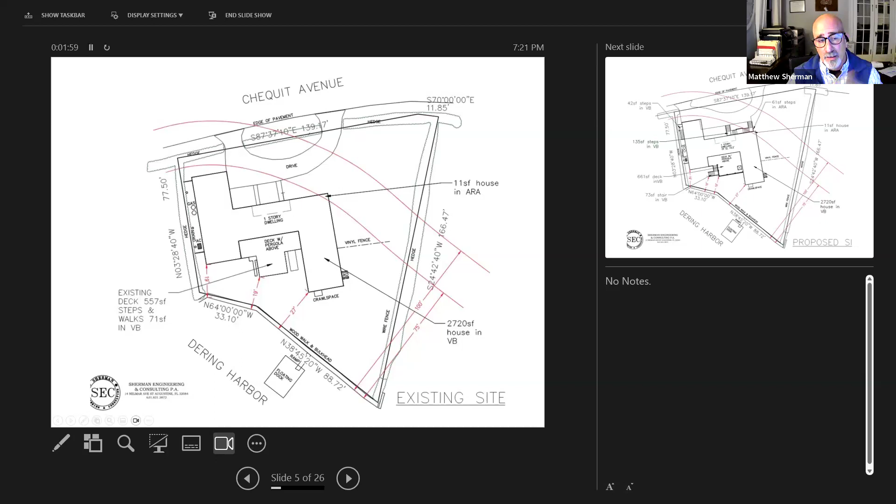There's an existing deck on the water side of the house, 557 square feet. Then there's a walkway on the left-hand side, a couple of stairs down, and a little walkway on the left-hand side as well as one on the right-hand side. Those two steps and walkways together combine for 71 square feet.

And what we're proposing to do, and I'll get to an elevation here so you can see how this new site plan was developed, but what we're proposing to do is raise this house up. Right now it's right at grade, so we're going to pick the house up about 8 feet above grade. So now obviously we can't get into the house with the existing access that we have now. So what we're proposing is a series of stairs and landings in order to get access into the house. Currently, this area right here is a covered front porch.

Excuse me, that's Matt, can I interrupt you? It's David Austin. We can't see your pointer when you're pointing at something, so just so you know. Hold on, may have to be just a more descriptive. Sorry. How about now? There you go. Yeah, all right, now we see good. Thank you.

Okay, so this area here is the front porch, the current front porch. It's going to be enclosed into the living space of the house, and I'll show you that in a second with the proposed floor plans. In doing so, we're moving the front door over to this side, getting it further away from the wetlands and getting it so that the stairs can go out into that adjacent regulated area.

The design as we've got it now, to give it a little bit more curb appeal, is to have the stairs going in two directions so that we're coming on both sides of the entryway. So we've got 135 square feet of new steps within the vegetated buffer, and 61 square feet of new steps within the adjacent regulated area. That's to get access into the house itself.

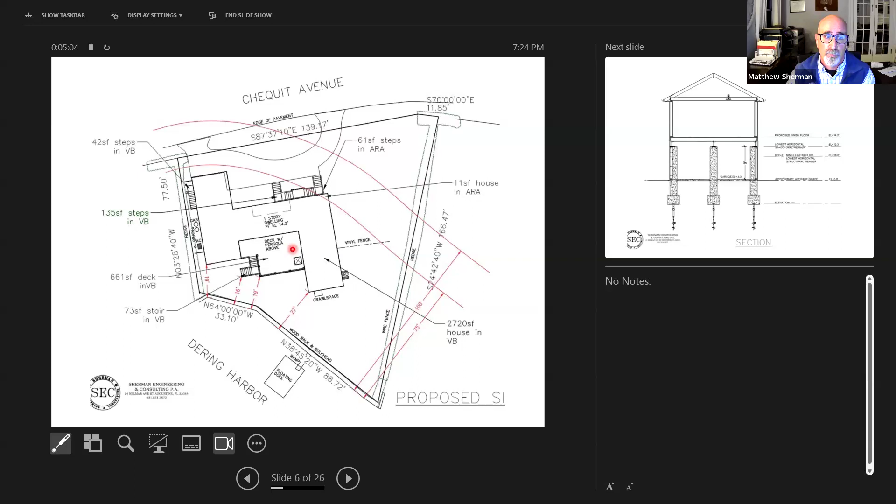This is just one of the drawings that the architect has prepared. This is the basic layout for the elevation, the section of how the new building is going to be configured. Our existing approximate grade is at about a 5-foot elevation right along here. That's current as it is now, and it's as it will be in the future.

The flood zone, because we're in a VE flood zone, requires us to have the lowest horizontal structural member to be at least 2 feet above our base flood elevation. Here our base flood elevation is going to be at an 8, so our base flood brings us to 10. That's the absolute minimum we can have for our flood protection to comply with FEMA flood zone regulations. We're asking to go a little bit higher than that, up to 12'3".

That extra couple of feet does a few different things. Number one, it enables them to get vehicles underneath the building so they can use it as a garage, and they don't have to be out in the driveway. The other thing it does is give us a factor of safety. This came up at the CAC meeting, and it's come up on other applications for docks and other things like that - raising it the absolute bare minimum just gives us enough for what we've got today. If the flood zones get reevaluated in another couple of years, we could very well find ourselves non-compliant again. So bringing it up a couple of extra feet enables us to have that double benefit: a little bit of extra safety for the building, and also usability underneath the building.

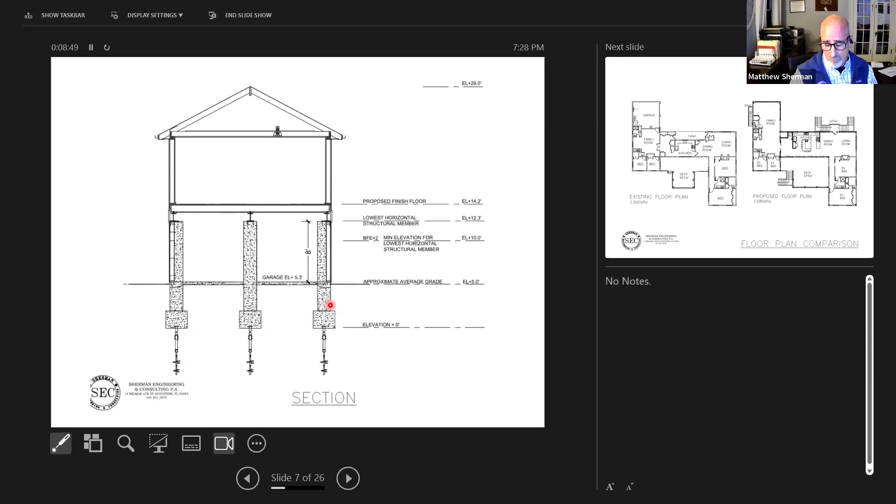Just real quick, going over the floor plans. This is the existing floor plan, with the covered porch we talked about and the existing garage with garage doors on the right-hand side. For the most part, the building will stay fairly consistent with what it is now. The main changes are the garage gets turned into a family room, and the kitchen gets expanded into what's now the covered porch, which moves that doorway over to the right-hand side. So there's not a whole lot of changes, but it makes it a little more livable, with a more user-friendly layout and a bit more living space, while remaining fairly consistent overall.

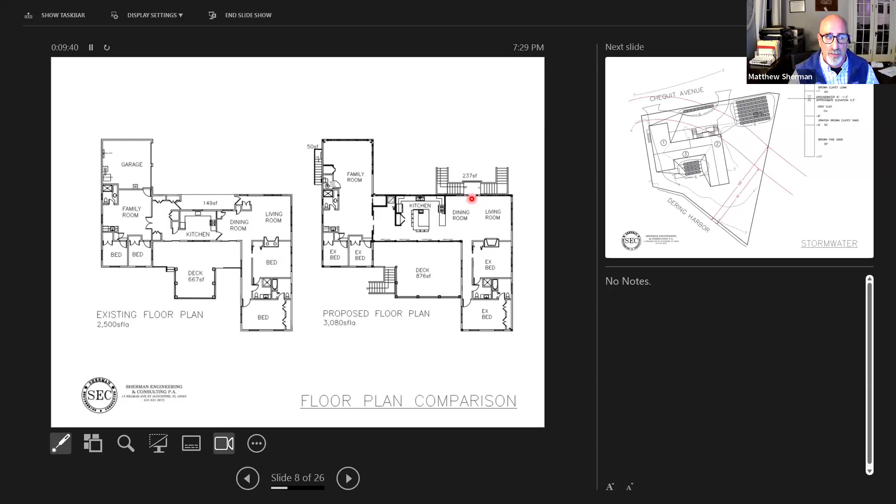This is the stormwater plan and the test hole I mentioned. We came down to elevation about 4.5, then hit that clay, which we found down to about 9 feet below grade, very unusual. Below that was brown fine sand, which is what we'd expect in this area. Because of that clay, it traps groundwater at a higher elevation, so in that area groundwater is at about 3 to 3.5 feet elevation, just over a foot below grade. That requires us to have much more stormwater control containment structures because they can't be anywhere near as deep.

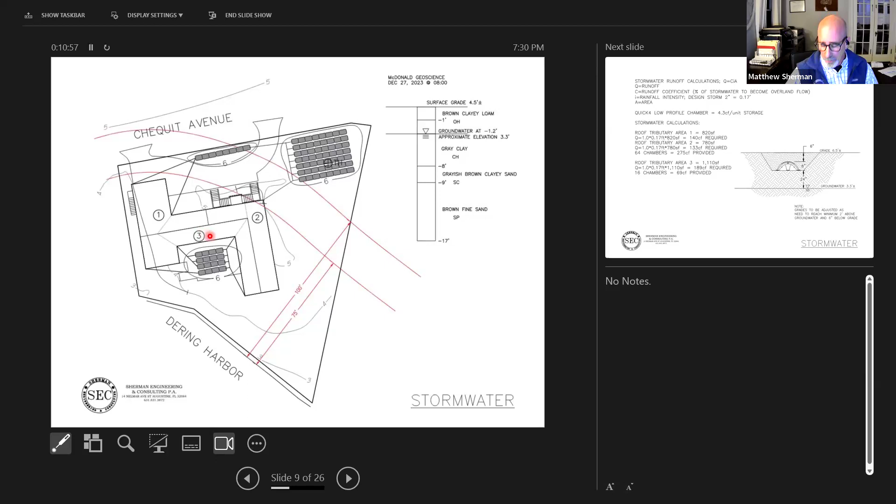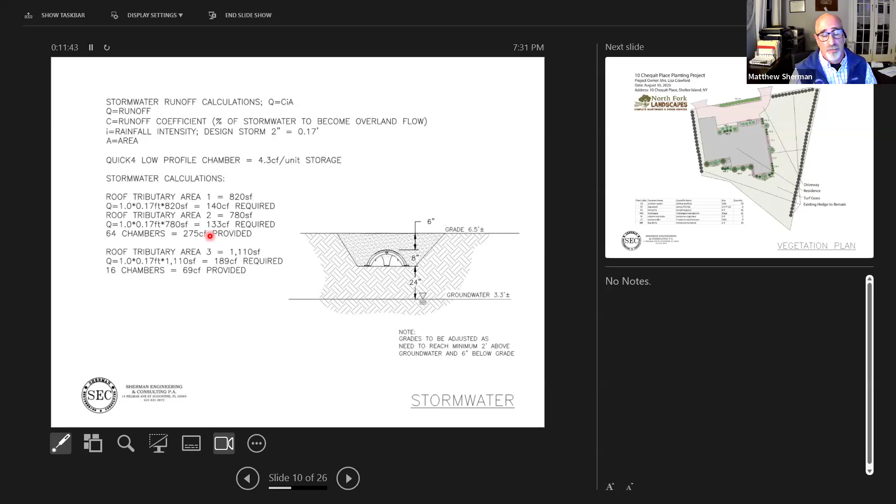So we prepared this stormwater design plan. We're able to capture all the stormwater from sections 1 and 2 of the roof and route it to these stormwater chambers. For the other section on the water side of the building, we just don't have room to contain 100% of the stormwater generated from section 3 of the roof. Another impact of that clay lens is we wanted to design for a 4-inch rainfall, not 4 inches per hour, but 4 inches over 24 hours, meaning if you get that much rain in a day you can contain the design storm. Initially we wanted 4 inches and were right at the limit, but once we realized we couldn't go as deep with our leaching chambers, we had to dial it back to a 2-inch design, which is the town standard. We were hoping to do better than standard, but unfortunately the site conditions didn't allow that.

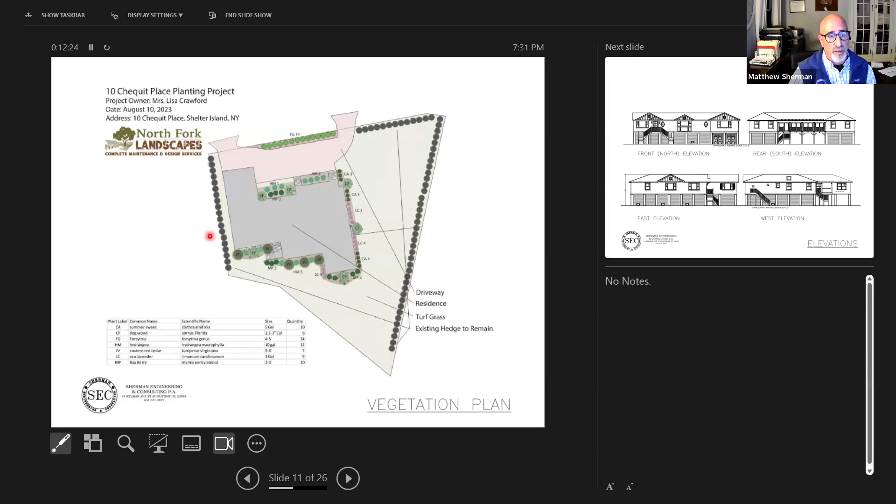We also did a landscape plan, basically some minor landscaping around the building itself. We didn't want to make it too dense, so that if stormwater is flowing through with debris, the landscaping wouldn't act like a net and capture that debris. So it's not a very dense landscape plan. All of the designed elements come from the town's list of native species and recommended species for these kinds of properties.

Here's our elevations. It's basically looking very similar to what's there now, just 8 feet higher, so it's been picked up into the air. We've got some new design elements on the roof to help break up the look of the building from the roadside.

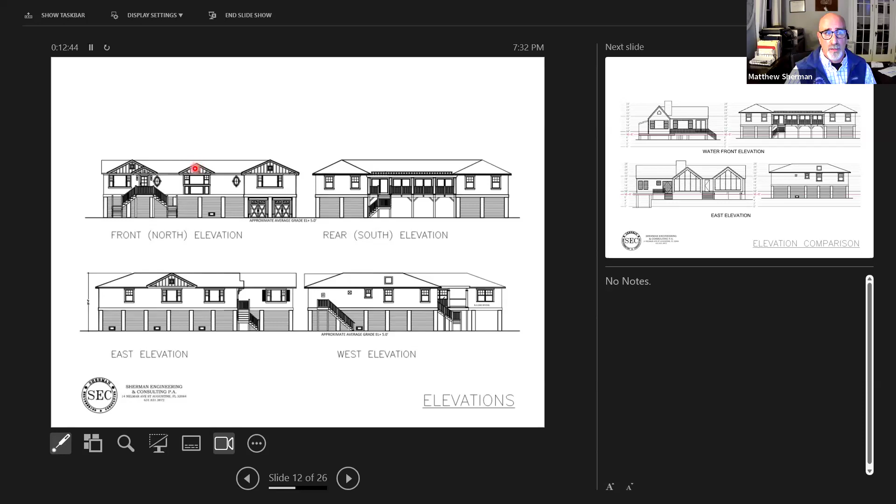This is something that had come up at the ZBA, and also at the CAC meeting. One of the questions was how is this going to look in relation to what else is going on around it? It's very hard for people to picture in their head what this building is going to look like if it's higher, up on piles or up on piers.

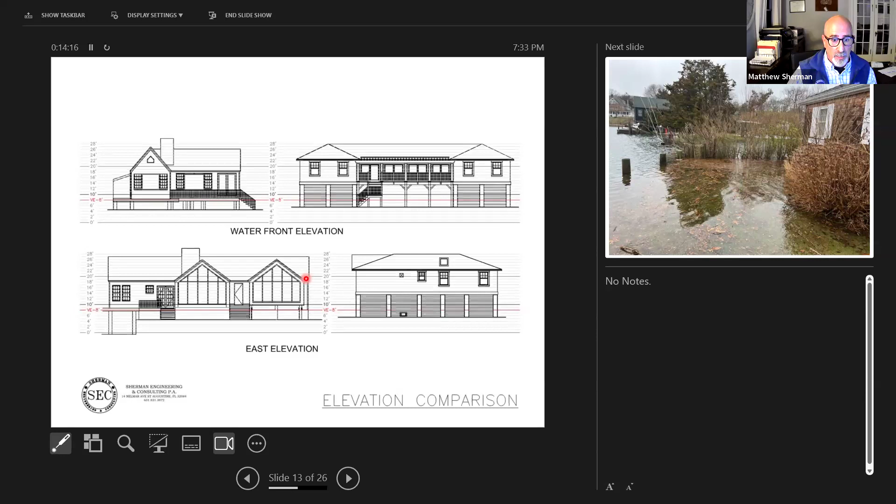So we used this at the ZBA as a comparison. The property right next door on Dering Harbor, going up toward the top of the hill, a few years ago went through a relatively similar project where they took the existing house, lifted it up, put it on piers, and made it more compliant with FEMA flood zone regulations in place at that time. That house has a roof ridge line at 27 feet elevation above mean sea level. We're going to be asking for 28 feet. We're bringing our finished floor up significantly more than they did, but they had a significantly steeper pitched roof. So what they traded off on a steeper roof for a lower floor, we're asking for a higher floor and a shallower roof, bringing that floor up so we could have that distance below and that extra factor of safety against flooding and damage during a heavy storm event.

These flooding events unfortunately are becoming more common. They're not super common, but common enough now that it's not a surprise anymore. It used to be that you'd see this happen and couldn't imagine where it was coming from — it was only during significant nor'easters or hurricanes. Now, if it happens, it's unfortunately not as surprising as it once was.

So that's what I have as far as my presentation is concerned. I don't know if the board has direct questions for me, or if you've got questions for the property owner — happy to answer any questions.

Matt, this is Julia. Yes. Can you hear me? Yeah, yeah. Hey, Julie. Good, can you just go over again?

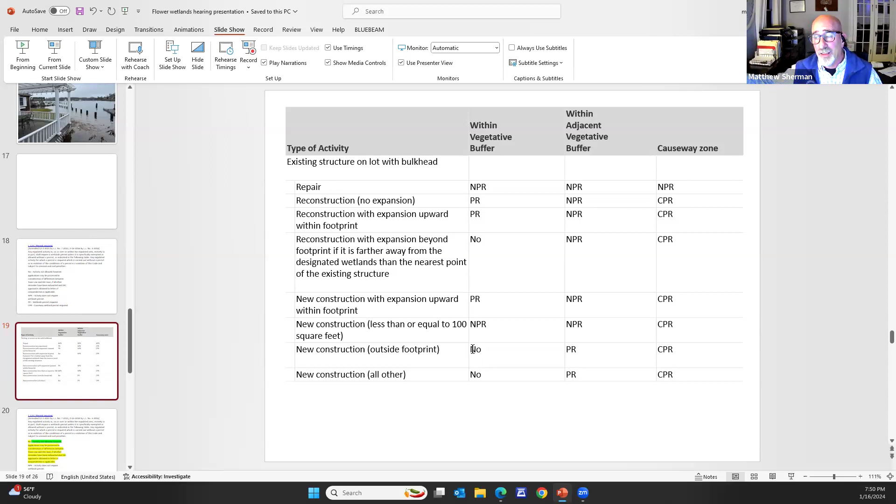This is the one that gets us for the decks. Reconstruction with expansion beyond footprint - I'm sorry, not that one, because that's further away, that doesn't apply - but new construction outside of footprint is the second one from the bottom. It says no, you're not allowed to do that within the vegetative buffer. Within the adjacent vegetative buffer, you need to get a permit to make it happen.

However, in the definition, no is no activity allowed. However, it does give you a safety valve. So in applications that can be processed, if there's differences between town law and DEC law, if all other remedies have been exhausted and DEC approval or letter of non-jurisdiction is applicable. In this case, we have a DEC letter of non-jurisdiction and there is no other alternative to get to these second floor areas. And there's a couple of others that, obviously this is new with the planning board. Several other projects that were in front of the town board over the years where they allowed new construction within the vegetative buffer. This is one from July of 2016 out on Dering Harbor.

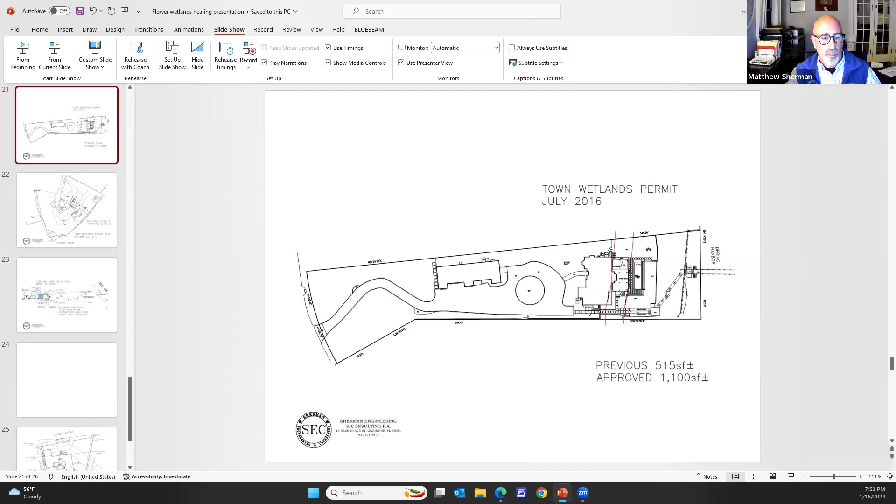On the right-hand side, let me see if I can get my pointer going. I agree with you, Matt, I can cite a few too. It's just that we have to rely on our attorneys and the town attorney. And when we told them about that same clause, which I would kind of agree with you that the planning board should have some flexibility for extreme cases, we were stifled. We were told no. And we had to tell this other applicant no, and that's how we've been operating to date. This may come up and we may be able to get the town board to re-review it, but right now I think we're taking a stance.

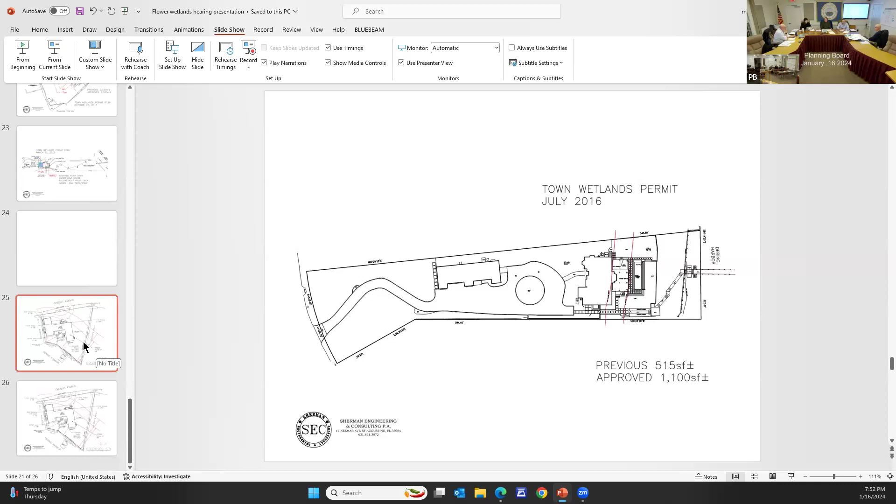I am, yeah, we discussed that. We had the same issue before with the previous one, where we went back and said come up with a way of staying in the same footprint. And what they did is they moved something and moved things around so they could stay in the footprint. Right, okay, because you said you would like to have some flexibility to help real hardship cases out, and this is, I would say, a pretty hardship case. But I think there are alternatives because basically you have the footprint of the house. If you reduce the footprint, if you reduce the living area of the house to stay within the same envelope, you could have what you want. What you're trying to do is go beyond the envelope of the current house, which is not allowed by the...

Hey, Matt. Yeah, I'm here.

It varies on... Did you hear, Matt? Yeah, I can hear you. How much I can hear you. How much expansion are you asking for?

Hold on just a second, let me get, make sure you heard, which we haven't seen before. Before we used to see a delta showing the actual differences, and we're not seeing that quite as clearly on this application. Yeah, absolutely. Can you guys hear me now? Or are we having technical difficulties still? Okay, all right, good.

The difference is, let's see, give me a quick second. And when I'm done looking at this, Gabby and I and the property owner had gotten together with a couple of different alternatives as well. We can't get it down to zero - not without coming in from underneath the building, which doesn't make any sense. We can't get it down to zero. However, what we're talking about is 100.

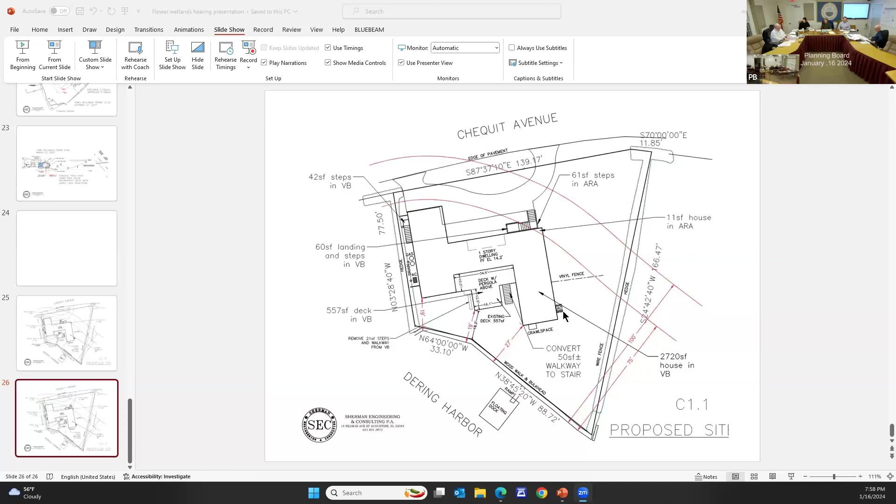That's not the point. On the last application, which unfortunately you're not familiar with, the applicant wanted to move a small wooden staircase off the side of the house, and we unfortunately said no. We were told by the building department that would be considered new construction, even if it was moved. So that's the message we were getting.

Yes sir, so this rendition you're going to see that Matt is putting up, I'm actually glad we did this. We just kept it very simple, and we're trying to juggle a few different angles here. We did have some conversation with the Heights, and if I'm not mistaken, they were okay with our proposal of pulling up that front portion and just doing one stair.

It's a designer thing, and I'm sure you guys have a lot of experience too - some of you are design professionals. We try to please all aspects architecturally, zoning, setbacks, buffers, etc. So this rendition that Matt's going to pull up is really a bare minimum.

Can everybody see this? Yeah, you want to interject? You want to go for it, Matt? Yeah, real quick, let me get my pointer going. Matt, could you put the red one back? Red cursor? Yeah, I'm pulling it up. Actually, I might not be able to, because I think that's what was crashing my system a couple of times. You can see your cursor. You can see that one? Okay.

Yes, so this is again the 75-foot wetland setback. This is the least of our preferred options, but this is the landing for the front door. 60 square feet is within the vegetative buffer. We come out 61 square feet in the adjacent regulated area. We still have the 42 square feet for the electric meter. This holds the same rear deck as what's there right now, just 8 feet higher.

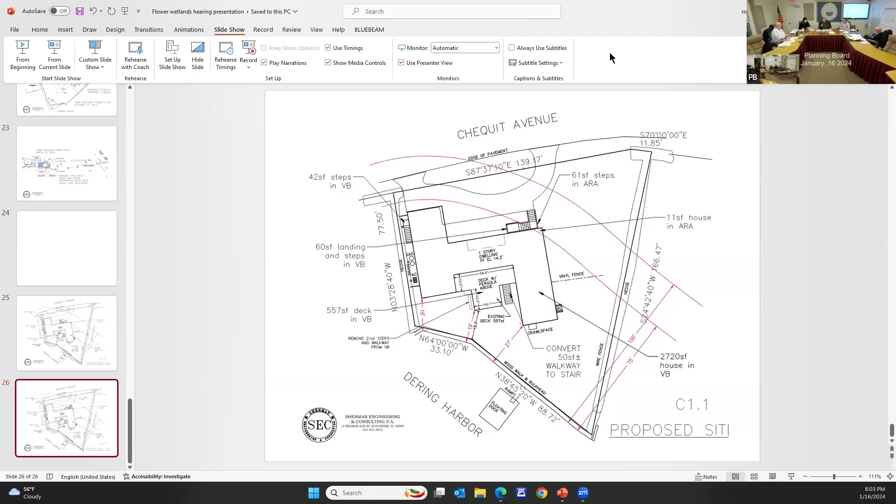The one pushback we got was from the building department saying we've not categorized or documented the use of the 100 square foot exemption since 2000, so we don't feel comfortable accepting the add in the VB. Though I do have it, even from previous building inspectors and previous town attorneys in writing, that it's tradable. It seems though with this current recommendation it's a 2-foot difference - you're at 1642 currently with what's in this new proposal, which is 102 square feet, correct?

So what is the new one? The one he just showed us: 60, 42, and 50. So that's 152. Where's the 50? So 50 is the steps in.

I was wondering, do the stairs count, are they permeable? Well, that could be considered. The front could be considered permeable. I feel really sorry for the previous applicant. I would agree that we have flexibility, but we didn't allow the previous applicant even this. We would be setting a bad precedent.

You'd have to put the stair, basically you have to remove it off the deck. They already have stairs up. Or we can possibly propose putting the stair within the deck footprint. That's what I was thinking about. And that's something that the Conservation Advisory Council requested. Yeah, that seems like the only other option. Because then you're at 102, which probably could be considered.

They had said to keep the stairs to existing footprint. At 102, that's de minimis, 104, whatever it comes to.

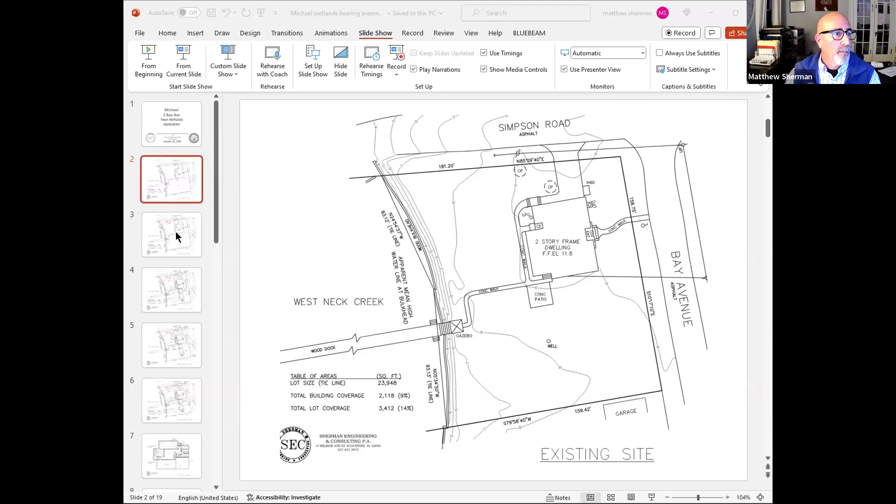A 100-foot wetland setback is running right down through the house. This is the 75-foot wetland setback. Let me go back a screen. This is the existing house as it is right now, the existing septic system, which is within that adjacent regulated area, and the existing well, which is within the vegetative buffer.

The proposed work is going to be an area of a new foundation underneath an existing screen room, another small foundation underneath an existing part of the building, filling in an area that's a current cellar entrance, like a Bilco door entrance, and then some other miscellaneous stairs and steps. Some are going away, some are coming in. That's for the main part of the house.

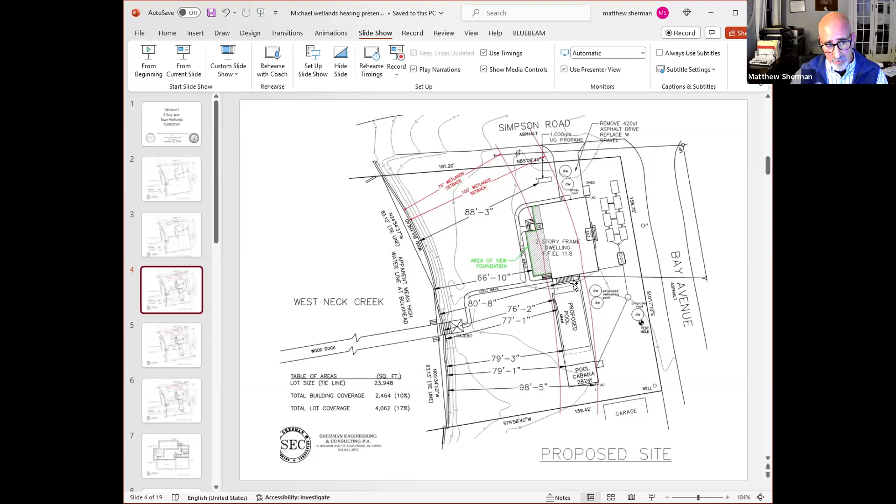We're not asking for a wetlands permit for a majority of that because it was approved and is under construction now with a valid building department permit. The wetlands permit is for some of the small walkways and steps, and this area here, between the main house or to the side of it, a basement entrance, a patio, proposed swimming pool, little patio area, and a small pool cabana. All of those improvements are within the adjacent regulated area, the closest being the corner of the pool patio at just over 76 feet from the wetlands boundary, which on this site is the bulkhead.

The areas within that adjacent regulated area: 68 square feet of stair and walkway, 19 square feet of the building. The proposed pool is 684 square feet, patio 407, and the cabana is 282 square feet. The new construction within the vegetative buffer is 43 square feet of stair, 38 square feet of it within the vegetative buffer.

These concrete walkways are basically remaining as is, or maybe we might change them to something like a permeable paver. So the impermeable concrete would be going away. We've got an existing stair that we're adding 3 square feet to. So we're at a total of 41 square feet of new work within the vegetated buffer.

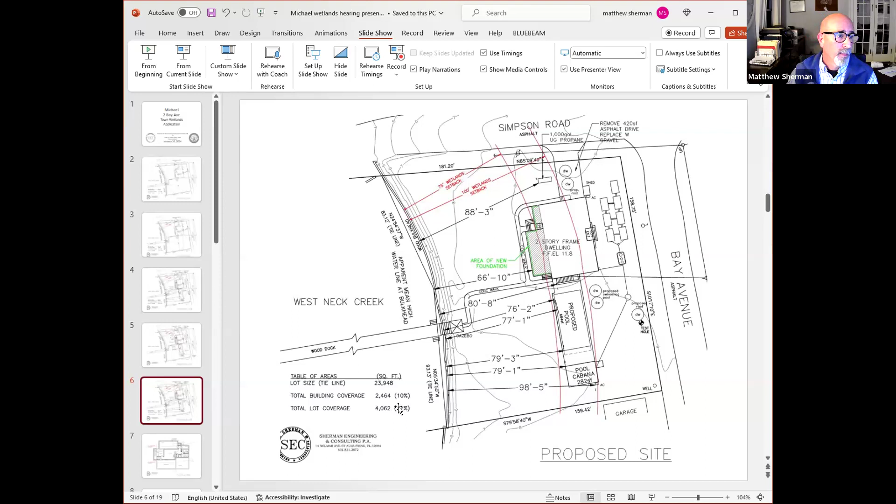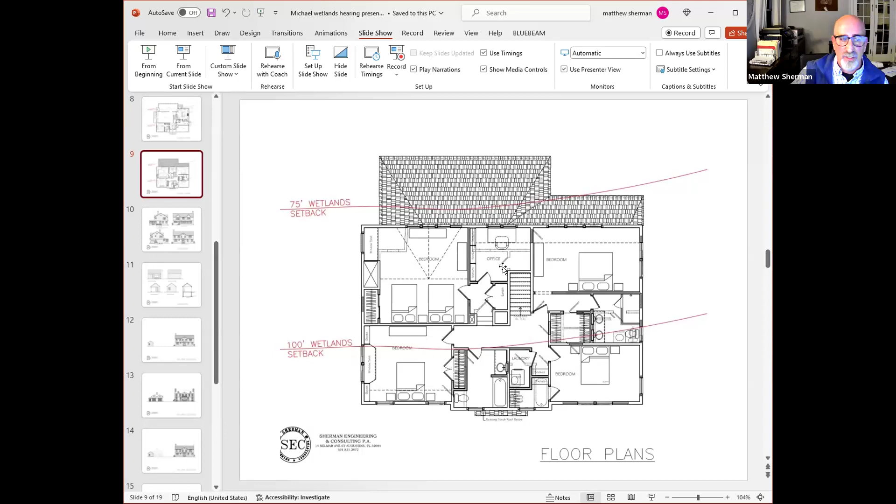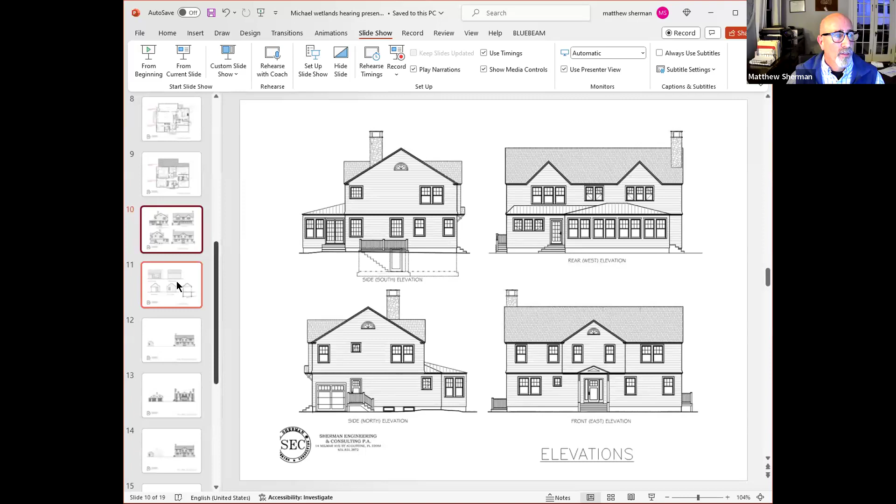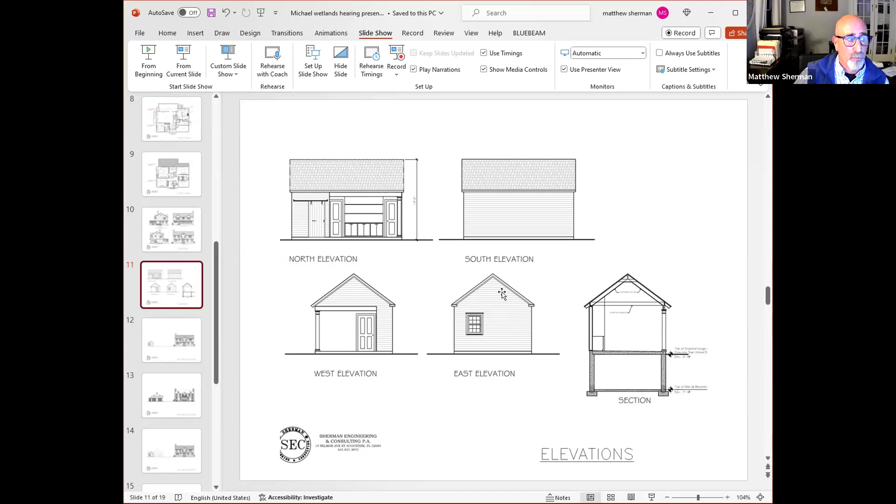For the pool house or pool cabana, it's a very small building. It's open, so you're going to have a small bathroom, half bath, toilet and sink, and then an open cabana area in 3/4 of the building. This is the view from the road. So as you're standing on Bay looking at the building, the house is to the right-hand side, the pool would be here in the middle, and then the pool cabana on the left-hand side.

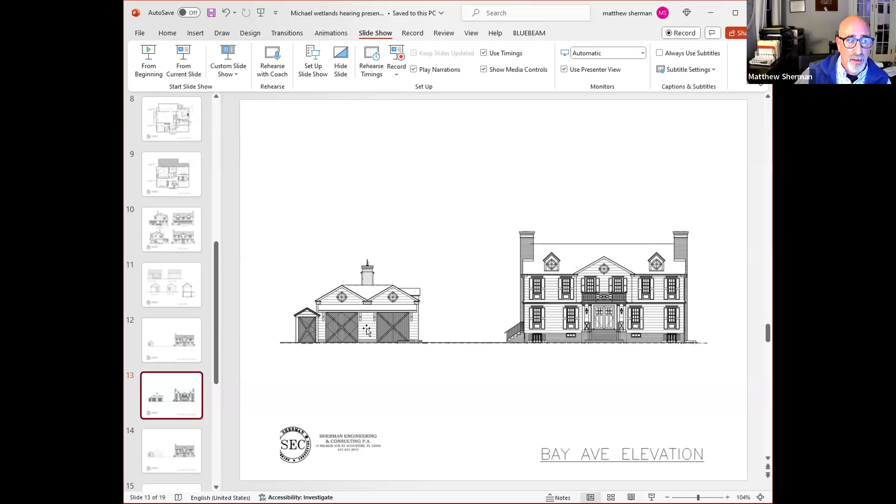Again, to give you a little bit of reference and something to compare it to from the previous approved plan, this is what was approved: the pool and a pool house with a storage shed on the back side of it. And that's what we're looking at now. It's significantly smaller as far as an overall project is concerned. The house itself is smaller, and the accessory building is significantly smaller than what was already approved.

One of the big concerns we have is obviously depth to groundwater here, just as with the previous application. In this case, groundwater is at a 1-foot elevation. Keeping the bottom of the swimming pool 2 feet above groundwater brings us to that 4.5 foot or so of total depth for the proposed swimming pool. The pool house foundation depth will be made so that we're not going to have to dewater or go into groundwater for pouring concrete or anything to that effect. The only thing happening in the basement of this pool house is the pool equipment, so we don't have to worry about having 7.5 foot headroom or anything like that in the basement of this building.

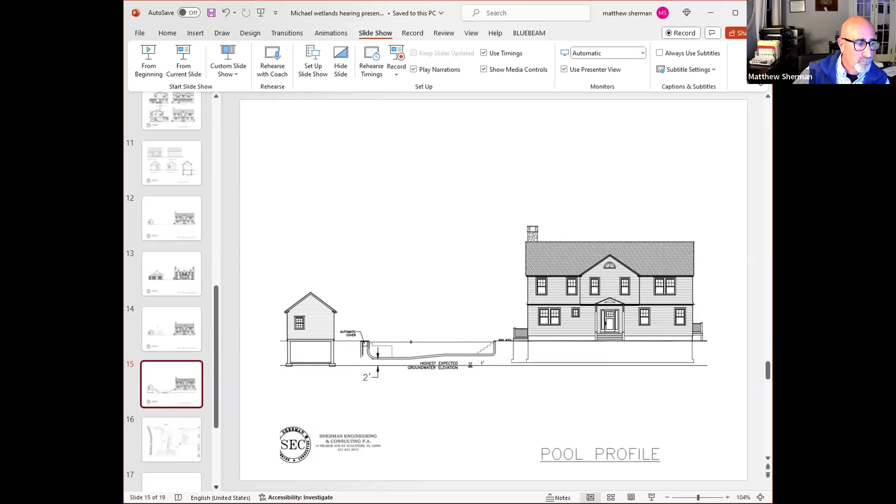The vegetation plan, Liberty Landscape had done the vegetation plan. For the most part, as far as the wetlands permit is concerned, what we're concerned about is what's happening on this bank, and seagrasses are going to be there. It's about a 10 to 12 foot wide buffer. The bank has a natural slope that comes from the top of the bulkhead up to where the lawn levels out, and that natural slope is what would be receiving all of that vegetation, all of those seagrasses.

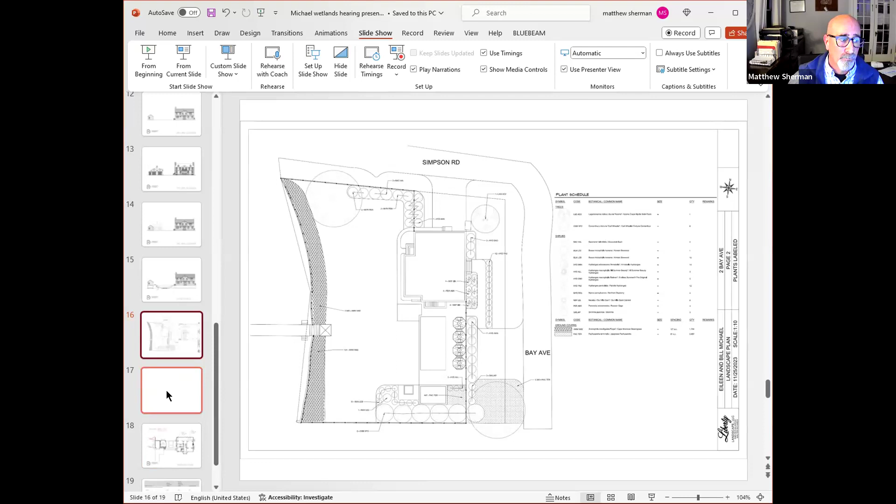That's the gist of the project. I've got, if the board has questions, I can answer anything. Again, the property owner, as well as his architect and his contractor, are here as well, if you have any questions for them.

I went to the site with Marcus a few days ago. We did notice that the bulkhead is new, so we don't have the same problems we're going to have in this Heights project.

Did have a question about a pipe that was near the bulkhead that has an alarm company sign in front of it so no one would hit their ankles on it, sticking up about so high. What is that pipe? It's not an oil tank, right? I don't know. I know it's not an oil tank because that was taken out years ago. I'll pass that on to Bill. Is it a flag? Could be. I've noticed that there. I don't know what it is. I know it's not an oil tank, so we looked at that.

All right, Matt, we'll have to try to figure out what that is then. Yeah, we can look into it. I know when I had done a project at this site, probably 5 or 6 years ago now, I would think, and when we removed the oil tank that was in the area where the pool would be going now, in that ballpark area. So I know that it's not that. So we'll look into it and figure out and see what's going on.

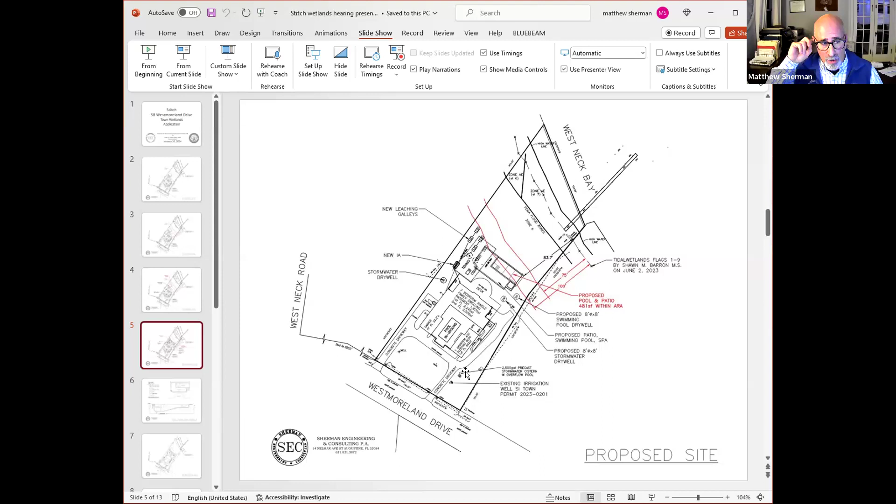So we're going to have a proposed pool dry well, some proposed stormwater dry wells. The existing pool that's there now is going to be abandoned, taken out, and it's going to be turned into a courtyard on the road side of the house. There's an existing irrigation well on site, which has got a permit from the town, and a 2,500 gallon precast cistern. We're going to use that for stormwater from the roof, and there's an overflow dry well for that cistern.

The swimming pool is basically a 16 by 45 pool with a patio that's just under 30 by 70. There's a little spa off to the side of the pool, and there's an existing deck off of the house. So the pool and patio are set just off of that deck.

We put a test hole in to see, as with the other applications, what the soil conditions were, and get a snapshot to see what we could expect for groundwater elevation. These waterfront properties, more often than not, the groundwater is going to be tidally influenced. So we look at the test hole as well as test holes and well data that we have on this property and a lot of properties around it to come up with an estimate for the highest expected groundwater. For most of this Westmoreland area, we know that groundwater is going to be at about a 1 foot elevation.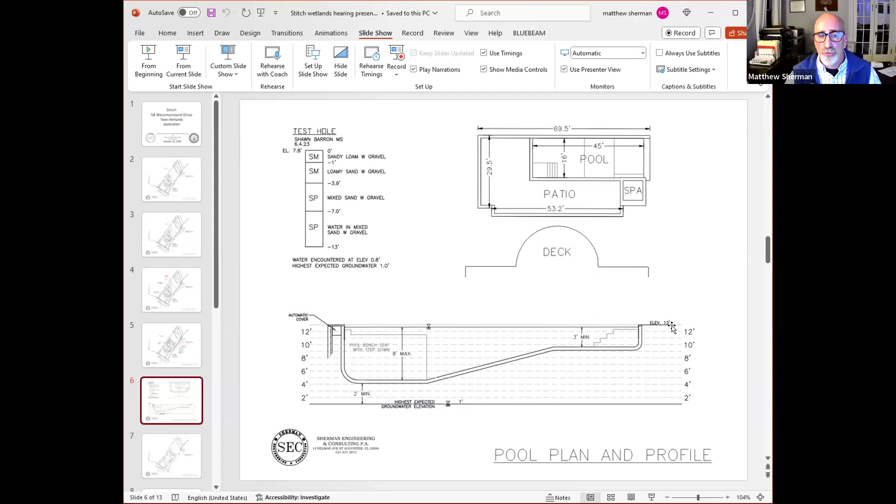Based on that 1 foot groundwater elevation, we're coming up at least 2 feet to the bottom of the swimming pool. In this case, we're at about 3 feet. We got an automatic cover for the pool on the deep end, and the top of the pool elevation is going to be at about 12 foot elevation.

So a simplified view of the property, you've got your side yard lines for the swimming pool, the setbacks of 20 feet on either side. We have to stay 20 feet away from the leaching pool, so we can't move the pool to the west at all. We're pretty much locked into the area where the pool is right now.

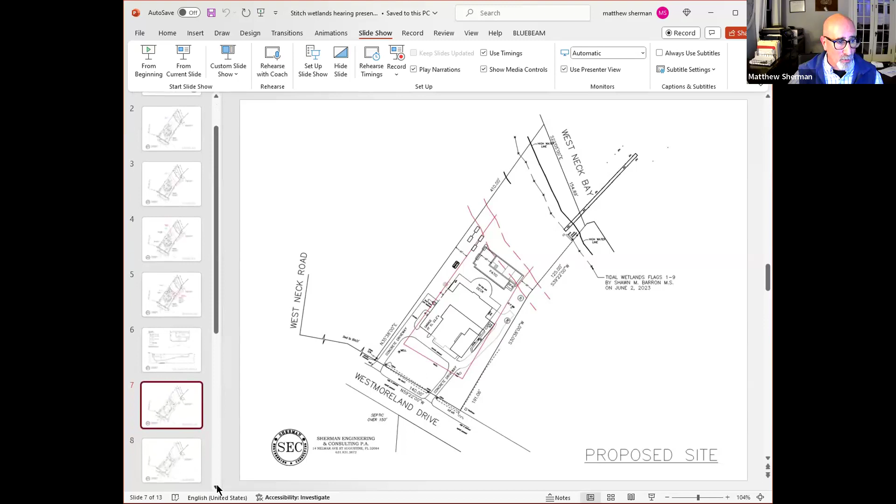We had looked at moving the pool underneath the patio, get it closer so that we could get it out of the regulated area. But what that would end up doing is putting the lion's share of the patio underneath the existing deck. From a usability standpoint, that doesn't make any sense. Also, it's going to interfere with the posts and footings holding up that existing deck, and it creates a very awkward, unnatural situation with where the pool and patio are in relationship to the deck.

One of the things we looked at is whether the town code, chapter 129, allows building in that 75 to 100 foot setback, the adjacent regulated area. But you want to make sure you don't have a better option that you're ignoring, or even a really good viable option somewhere else.

The idea of the pool being on the road side as it currently exists, it's less than 10 feet from the building on either side. There's no code standard for the minimum distance a swimming pool should be from a building, but the minimum recommended standard is at least 10 feet. It's a safety issue as far as people coming in and out, walking between the pool and the building, and splash issues.

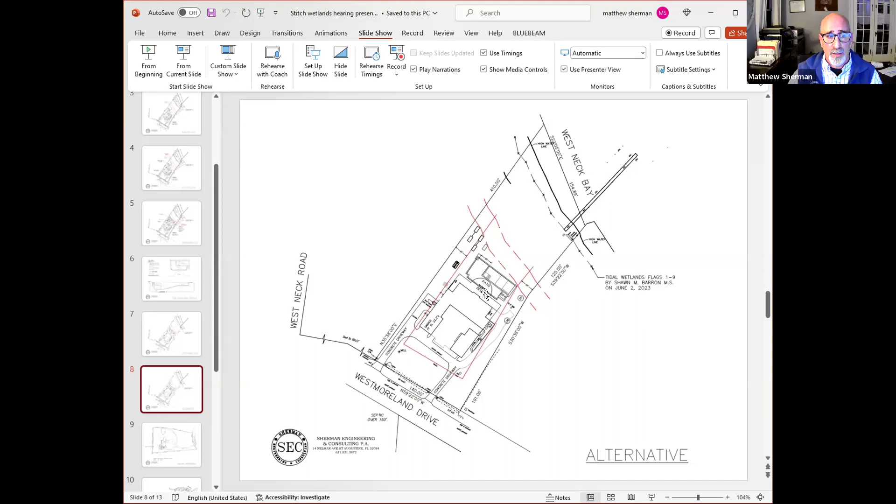As far as the town permitting history is concerned, we've got several applications where a swimming pool was allowed within the regulated area, even though there were other alternatives, when those alternatives were less than ideal. A couple of examples: this one was approved, a wetlands permit approved in April of 2021.

The swimming pool was approved right here. This is the 75-foot setback, this is the 100-foot setback, and the swimming pool is between the two. There are lots of other areas on this property the pool could have gone, but we didn't want to put it there because of trees and other improvements, septic systems, and things along those lines. This is also where there was an existing structure already, so there was minimal damage to the site by putting the pool in this location. The town agreed that having a pool within that 75 to 100-foot zone was not an unreasonable request.

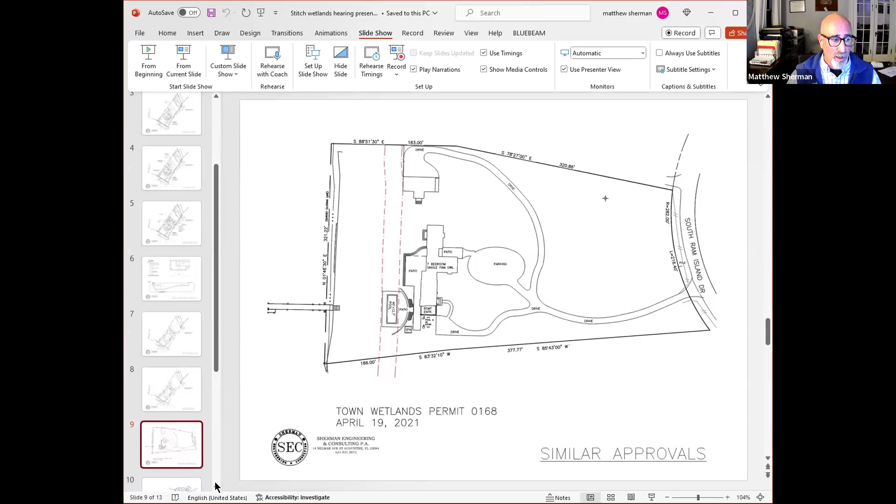Here's another one, from March of 2022. The town board approved this swimming pool, again within that adjacent regulated area. It could have gone to the west a little bit, outside of the regulated area, but getting it closer to the house made for a more usable, user-friendly configuration. The town board said that was again a reasonable request.

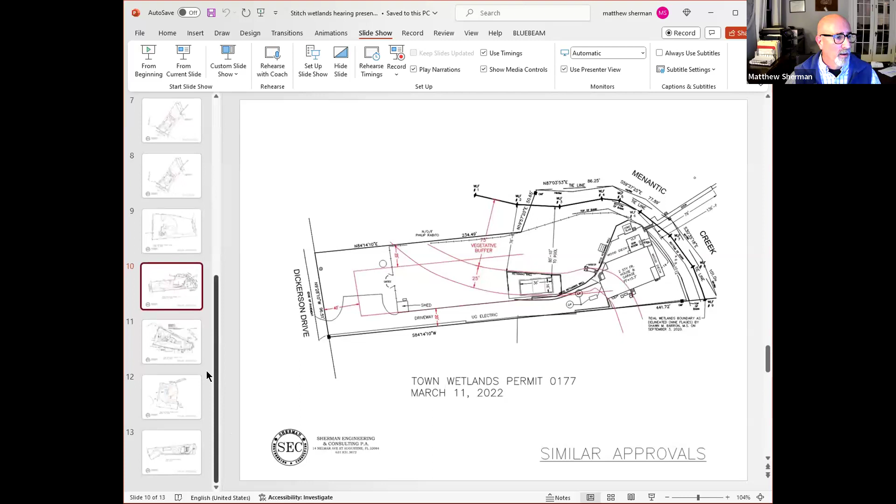I've got a whole bunch of these. I'm not going to go through all of them, but just one more to really drive the point home. This is a 400 and something, 500-foot long piece of property. There was an existing pool here on the water side of the house, in the vegetative buffer. It was removed, and there's a patio that takes up the adjacent regulated area. The town board agreed that putting that pool back in with an increased area of patio within the vegetative buffer, on the water side of the property away from the existing patio, made sense from a usability standpoint.

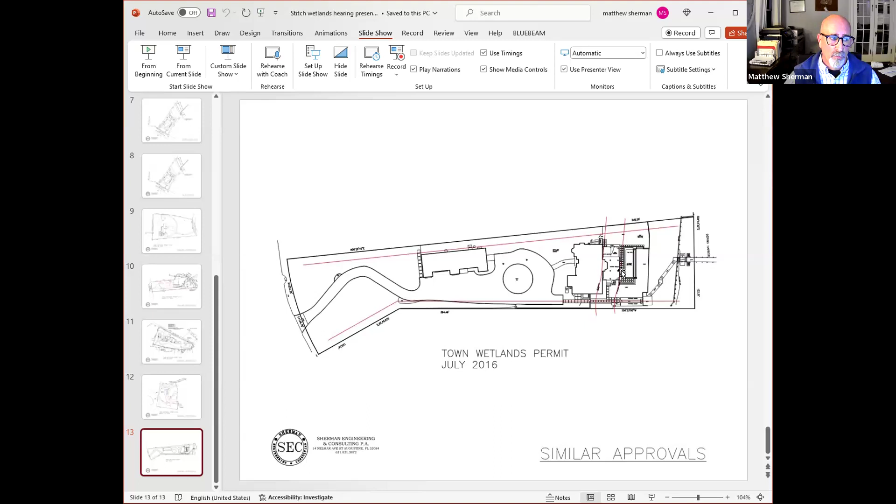We're just asking that the planning board take that same consideration into mind when reviewing this application. So this is a really fairly straightforward application: taking out the one pool, putting in the new one, taking out the existing septic system, putting in the new IA system, adding some stormwater control, and that's pretty much it. So if you have any questions for me, I'd be more than happy to answer.

Matt, I have a question. This is Julia. Yes, Julia. Tell me the amount of footage again that it goes over into the adjacent regulated area?

The proposed pool, sorry, just the 45 by 16. 400 and, let me see, hold on. It was 480 square feet within the adjacent regulated area.

So I totally get what you're saying about—obviously Matt and I went to, we know the house, we went there, and the pool is in the middle of the house, it's kind of odd looking. But the way it is right now, of course, it's out of the area entirely.

It's out of the adjacent, it's out of the buffer. Are there any alternatives, I noticed it's a 16 by 45 pool. I'm just thinking of my own pool, it's slightly smaller than that but I still get the good depth. Are there any alternatives to making that pool smaller?

I do understand that you disagree with the CAC's recommendation, but you can't really move it to the west because of the other setbacks that you need. But how about just making it smaller? We could make it a little smaller, but it's not small enough to get it out of the regulated area. You could shave a couple feet off of it, absolutely.